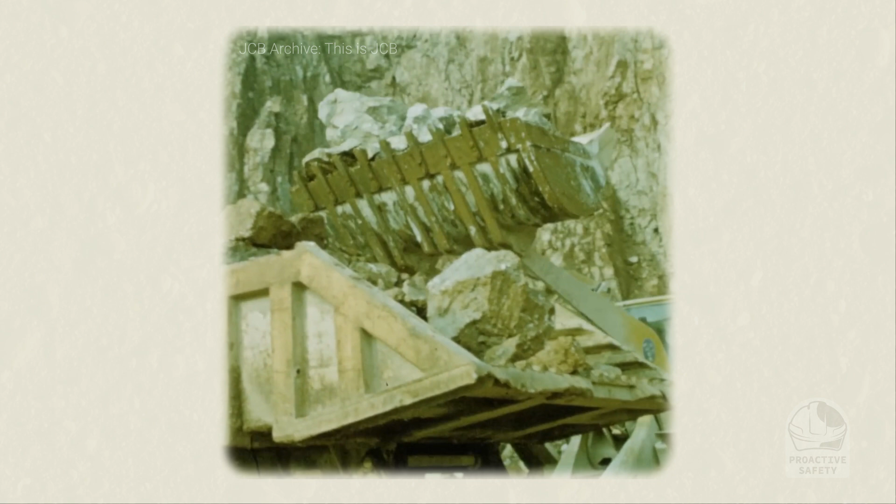Why train? It's necessary wherever you go. It is also a means by which operating costs, accidents, and injuries are reduced. It can save lives. Whether this is your first year on the job or you've been working for 20 plus years, there is always something you can learn.

As you progress through this course, you may be tempted to skip or ignore certain sections. Please note that by doing so, you may not only prevent the course from earning the appropriate score required, but it also may prevent you from learning or remembering important safety principles. Do not skip questions. Take the time to answer them carefully. They will prepare you for the final exam.

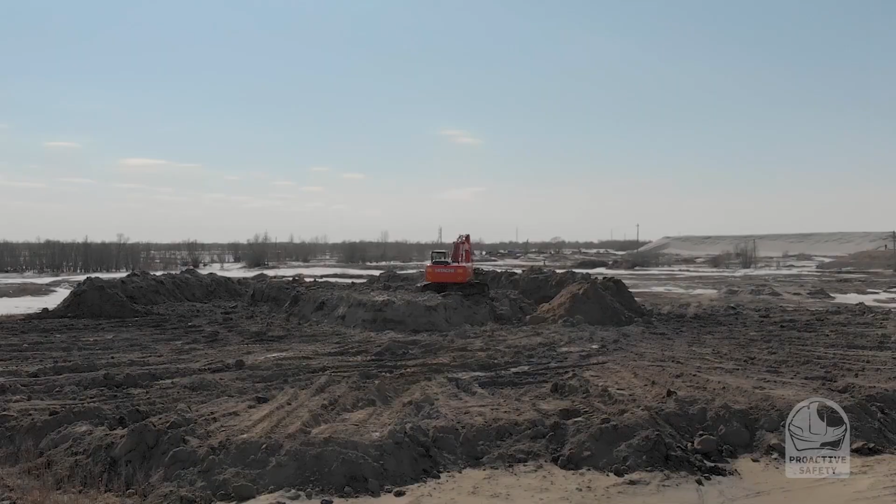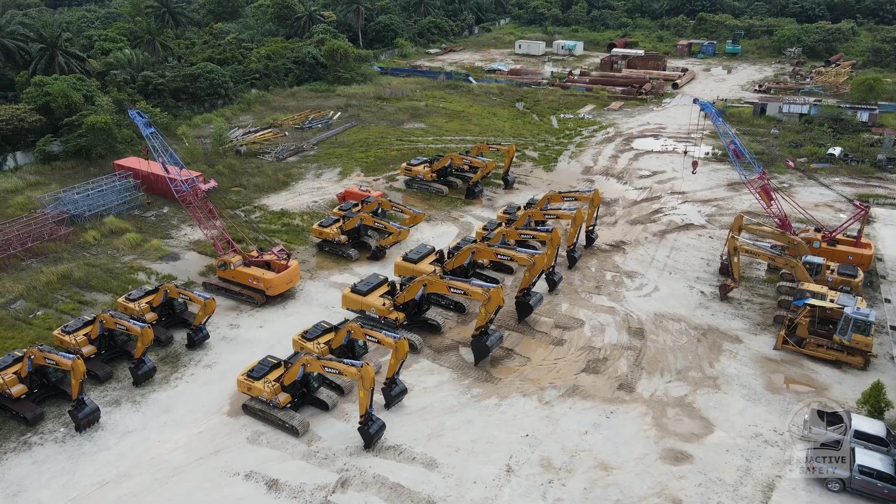Responsibility. The material presented in this course is for educational and training purposes only. All parties involved in the development, distribution, and maintenance of this course will be held harmless from any incident resulting from misuse of the content beyond the standard and purpose set forth herein. Before you begin, you should understand that it is your responsibility to comply with the laws and regulations presented in the following courses and its corresponding material.

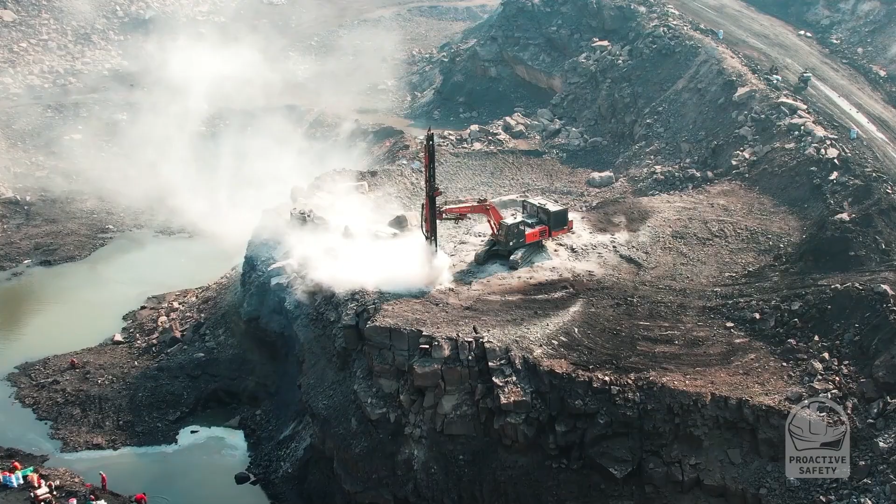It will be the responsibility of each operator to read, understand, and comply with the requirements of the operator's manual for their specific equipment. Likewise, it is your responsibility to strictly follow any additional guidelines specific to your own workplace. Good luck and stay safe.

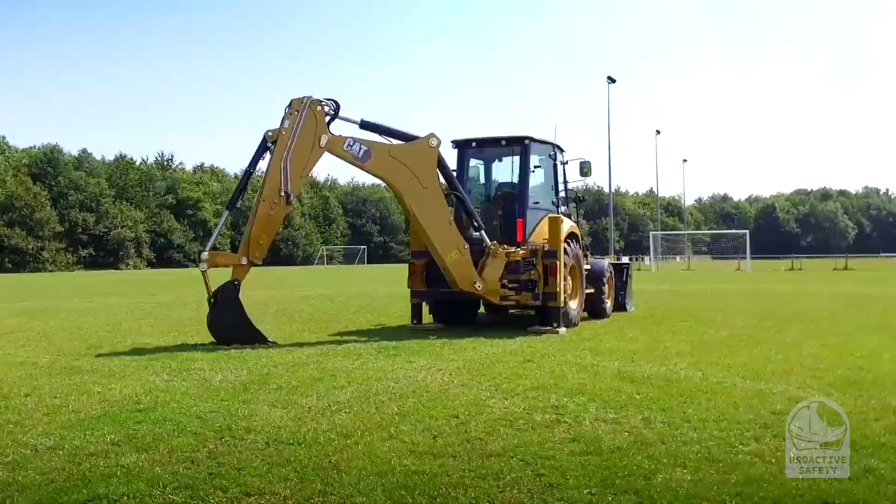Backhoes are versatile machines found on virtually every construction site. They are used for a variety of tasks such as digging trenches, demolition, and removing or transporting construction materials. There are a variety of tools that can be attached to backhoes, allowing them to perform a greater variety of tasks. However, while backhoes are extremely useful machines, they are also very dangerous.

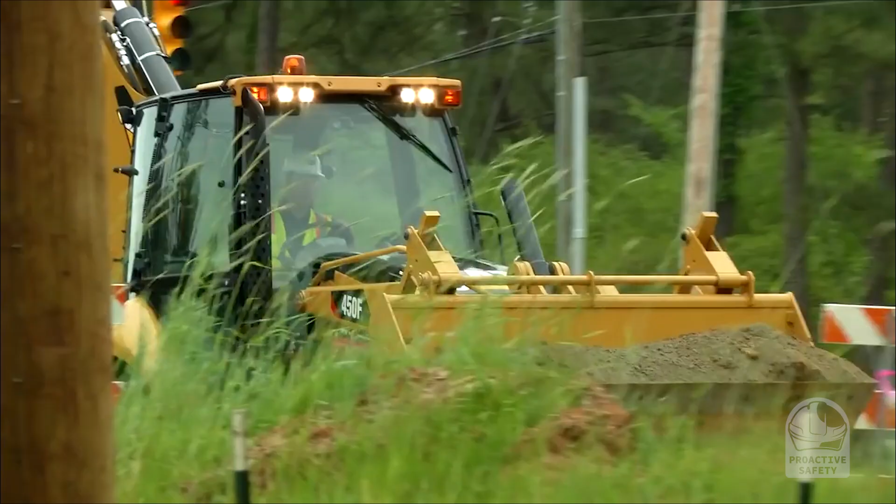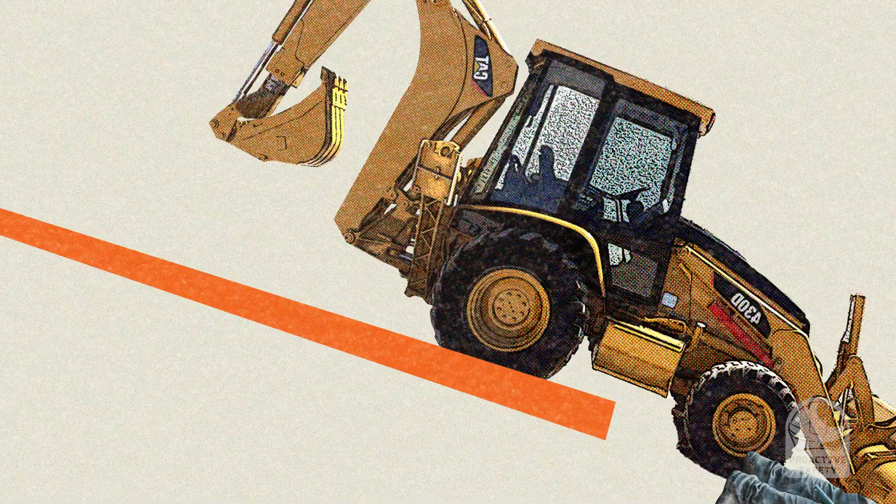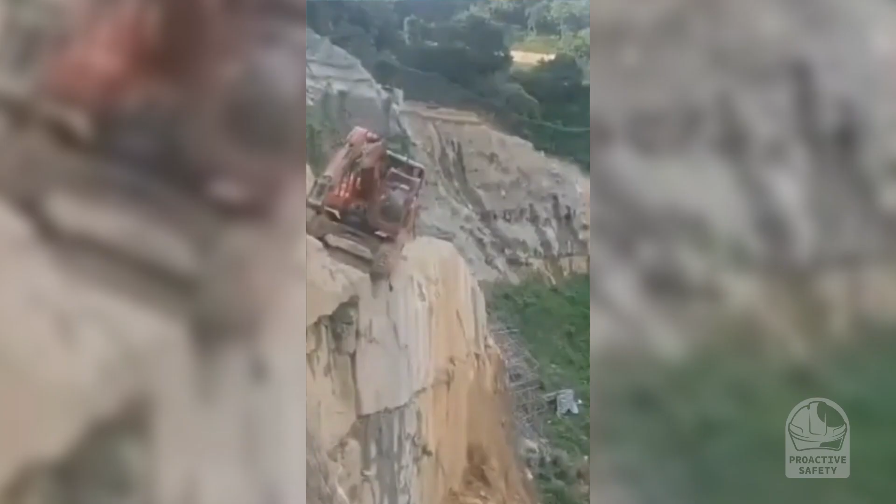However, as Chad drove away, the parking brake failed and the backhoe began to roll down the hill towards him. He tried to jump to safety, but the machine caught his legs and ran them over. Unfortunately, this is not an isolated incident. Similar incidents occur every year. In fact, research shows that around 800 workers die each year in accidents involving heavy machinery. However, with proper safety training, these types of incidents can be prevented.

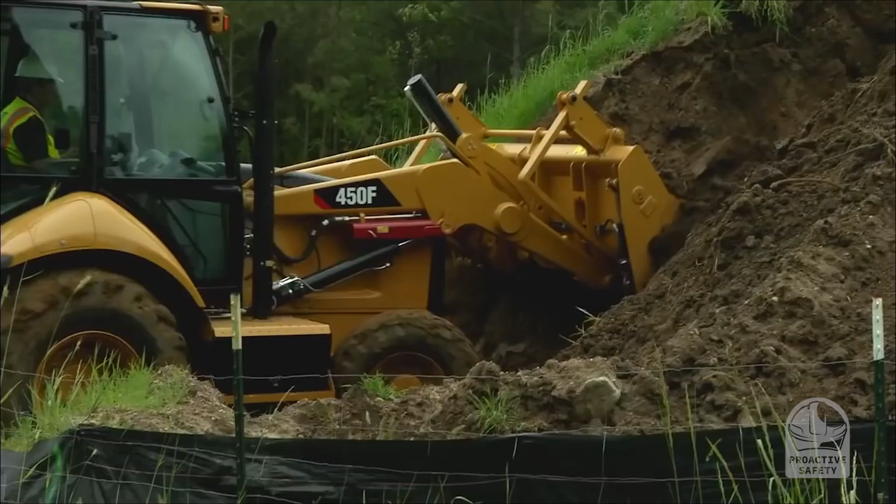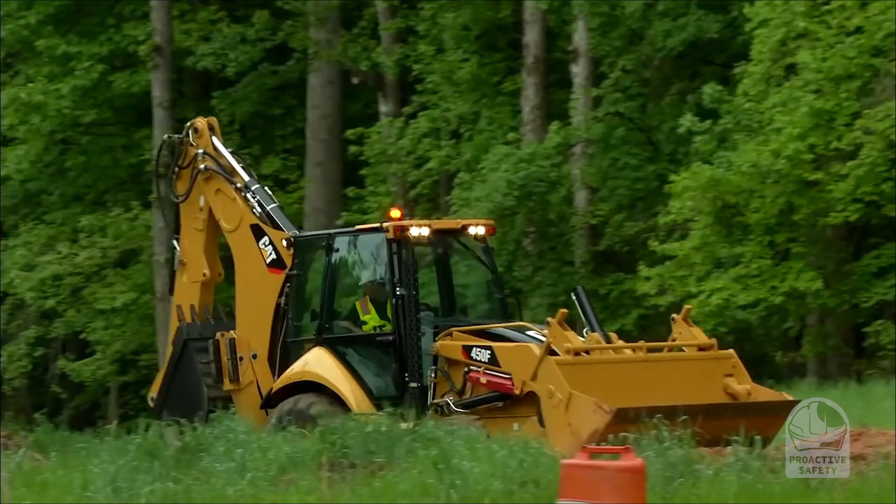In this training, we will go over the different functions and components of backhoes to help you perform your pre-shift inspections properly. We'll start with the components of inspections on the outside of the backhoe and then look at the parts and controls to inspect the inside. We will also review the concept of machine stability and focus on terms such as the center of gravity and the stability triangle. In that section, we will also discuss specific safety principles for maintaining stability, such as using outriggers or operating your backhoe on a slope.

Below, we'll go over what you can do to optimize the safety at work. This will include concepts such as maintaining your physical and mental health, as well as wearing appropriate PPE. Next, we'll cover the safety principles to follow when operating your backhoe. This includes how to set up your machine correctly. In the last section, we'll go over workplace planning, common workplace hazards, and best practices for avoiding or minimizing them.

Throughout this training, we will analyze profiles of real and investigated incidents or accidents. In some cases, 2 or 3 similar accidents have been combined in order to illustrate key safety principles. They will show how quickly things can go wrong when safety procedures are ignored, resulting in injuries or deaths.

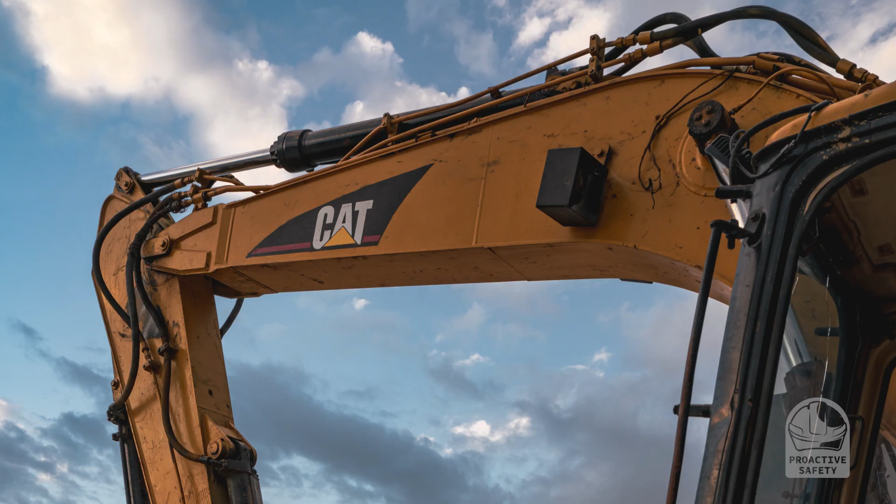Why train? No matter the situation, it's important to comply with federal and state regulations. Where does it say we need to train? Can't a worker be considered qualified based on experience? The answer is no. Experience helps, yes, but the regulations are very clear that employees must receive training no matter how long they have been on the job.

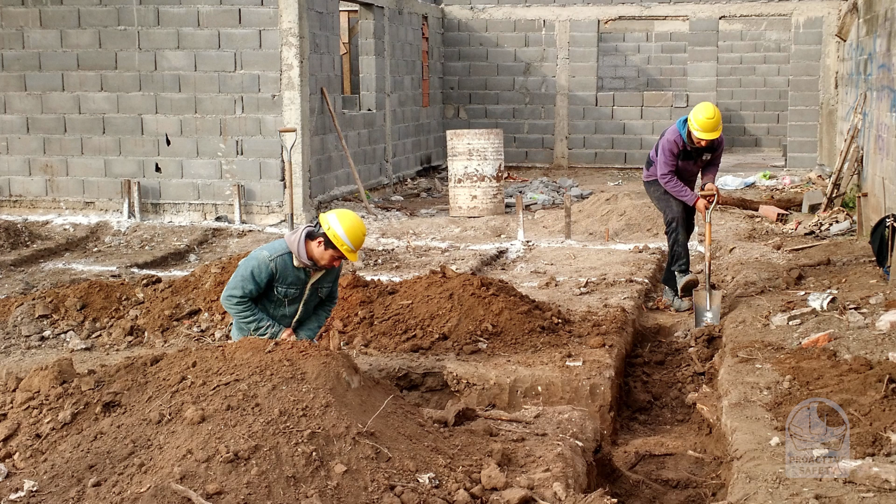And it is an employer's responsibility to oversee that safety training is being done and ensure that employees have the understanding, knowledge, and skills necessary to operate safely. Initial training and refresher training, as well as any written and practical evaluations, must be documented and archived.

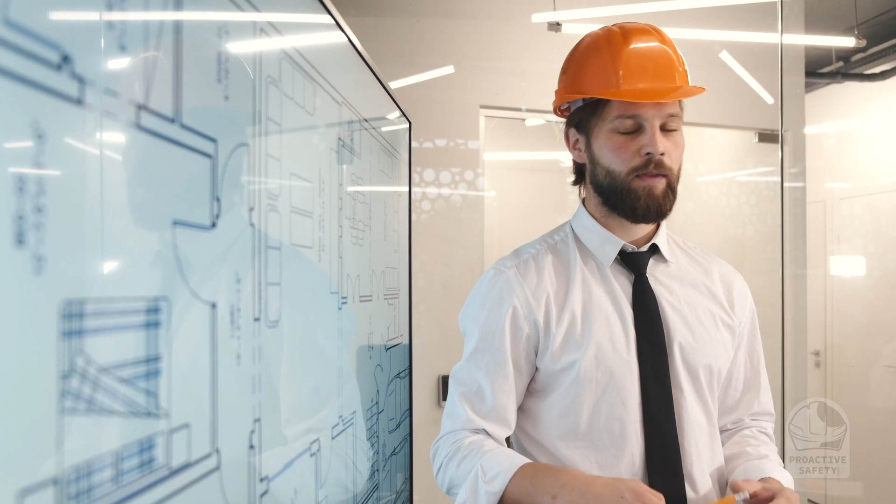As a minimum, employers must show proof of adequate and consistent training in the forms of training schemes, class lists, training goals, tests, certificates, etc. These documents must include the name of the person who taught the class or conducted the evaluation. However, training is not a one-time event. It is continual. In fact, training should be provided whenever it is demonstrated to be necessary.

Employees must receive training in the following instances. Number 1, there are changes in your assigned functions. 2, there are changes regarding possible risk of exposure for which the employee has not received any training. 3, any deficiencies have been observed in the work performance of an employee that is related to the safety and health of themselves or other workers. 4, an accident has occurred or an employee has been injured or there was a near miss during the operation.

The scope of training will be determined by the employer, but at a minimum must include proof of continuing competency. A presentation followed by a written exam and practical exam that proves continued competence.

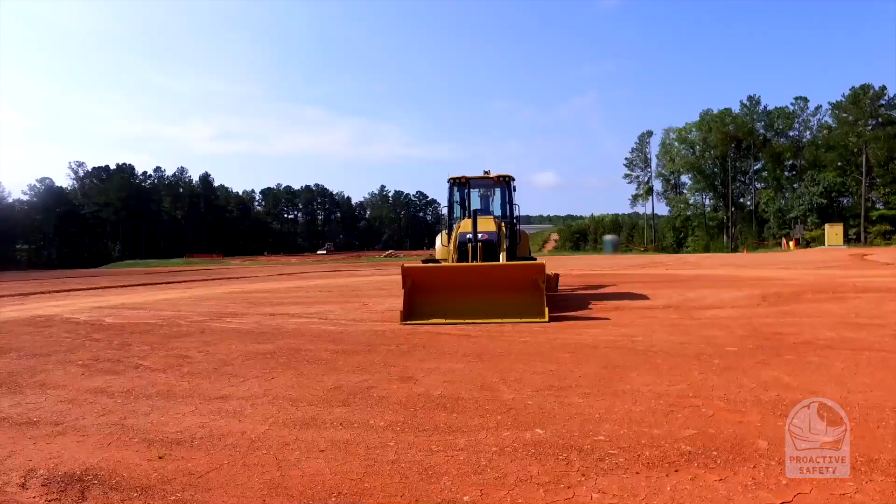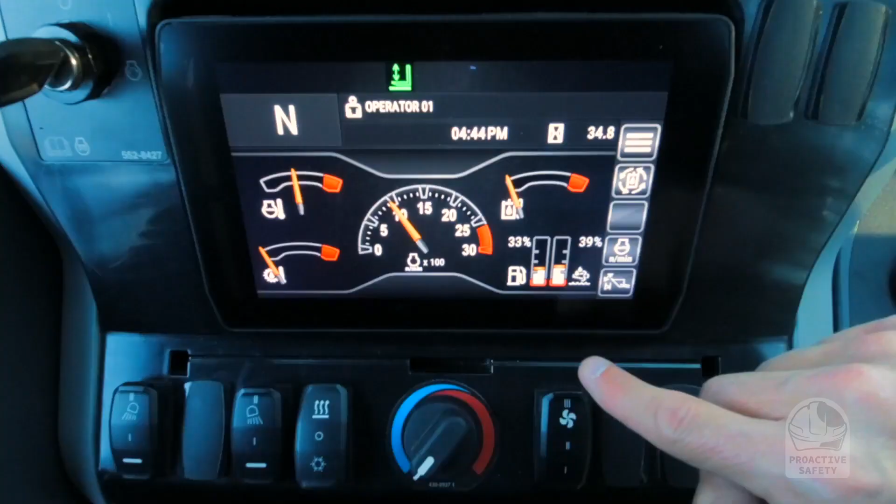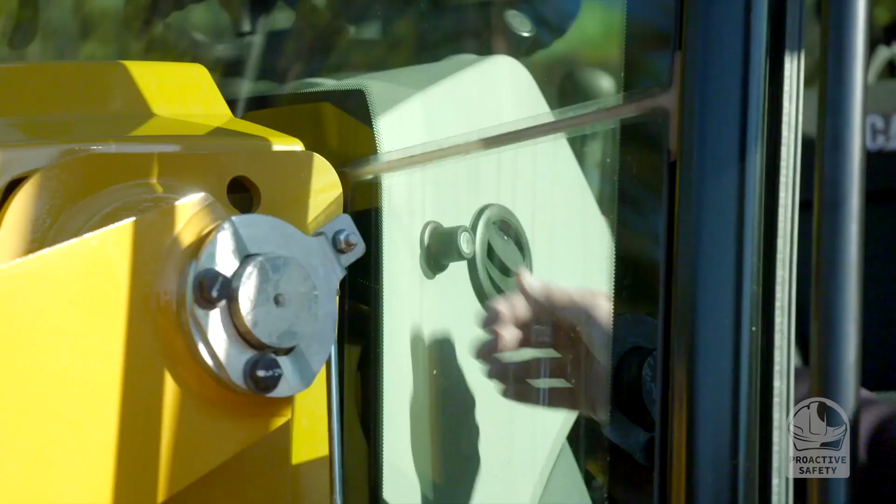Anatomy and inspection. In this section, we will look at the basic anatomy and concepts of the backhoe and describe each of them briefly. We'll also go over things to look for when performing a pre-shift inspection. The operator's manual should have a more detailed list. Pre-shift inspections are generally divided into 2 groups: inspections when machinery is on and inspections with the machinery off. However, we will address both checks at the same time. We review the exterior and interior inspections.

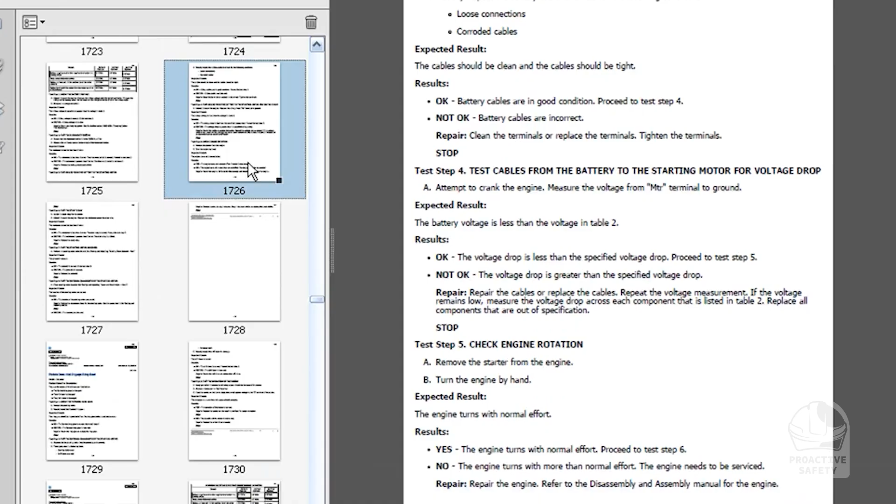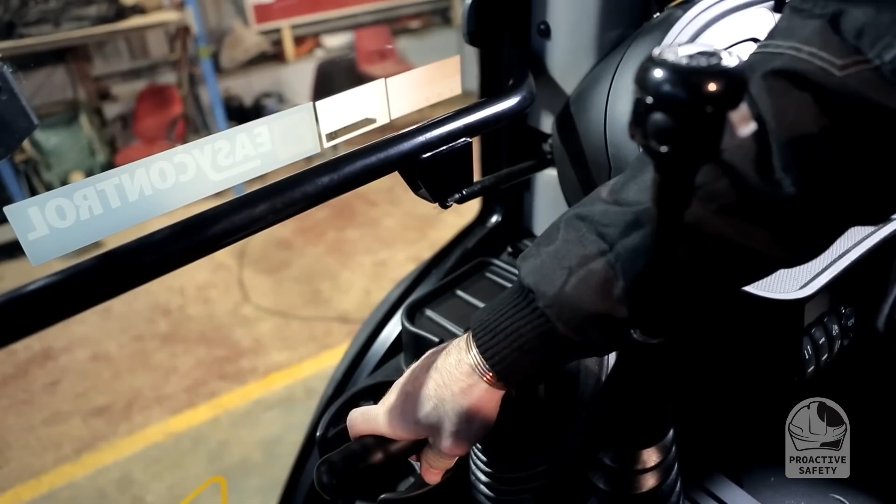Operator's manual. Keep in mind that getting familiar with the backhoe starts with the operator's manual. The operator's manual must be on the machinery at all times. Everyone who operates a backhoe should be familiar with it, especially the safe operation part. If your manual is illegible or missing completely, request a replacement immediately. While performing a pre-shift inspection, use a checklist specific to your backhoe as a guide. Your operator's manual will contain such a list, or your employer can provide you with one. Please follow the checklist.

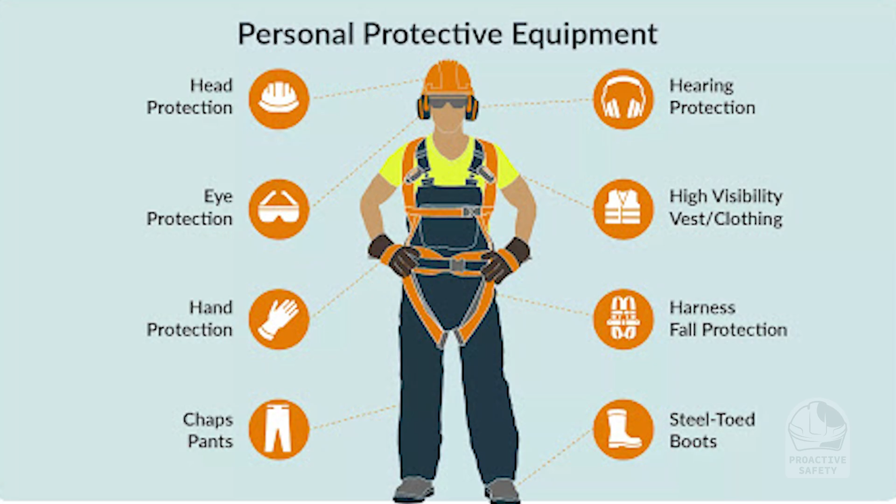PPE, personal protective equipment. Before performing any inspection, put on appropriate personal protective equipment. You may need coveralls, gloves, steel-toe boots, and eye protection. Employers should inspect the workplace and select appropriate PPE for their employees. Ask your employer what PPE is required for pre-shift inspections.

Maintenance mats. In addition to appropriate PPE, take extra precautions to avoid an accident or injury during maintenance work. Consider using maintenance mats to prevent slipping. Also, avoid working alone. Best practices say you should have a second person with you for maintenance jobs that require an engine to be running. Definition: maintenance mats are mats that help create an even surface or traction while working on your heavy equipment.

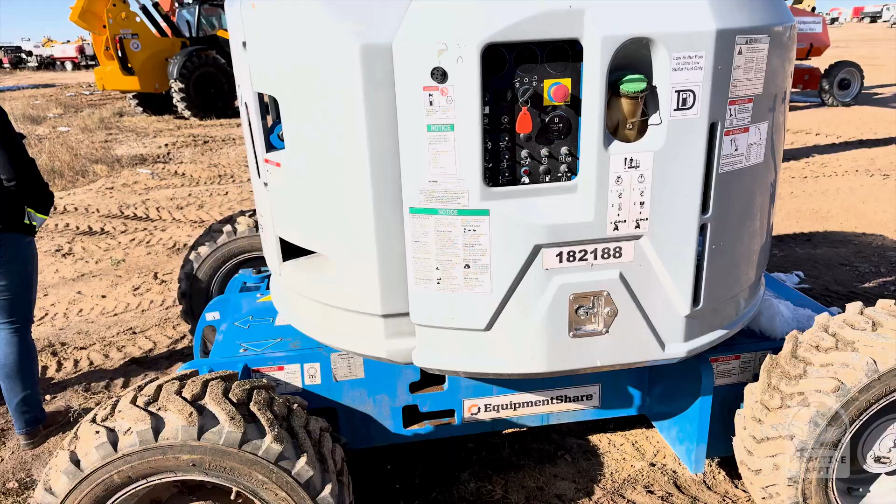Exterior labels. The exterior of your machine must have safety decals and label warnings of potential operating hazards. See the operator's manual for a list of required labels and their locations. Replace immediately if missing or if it's unable to be read.

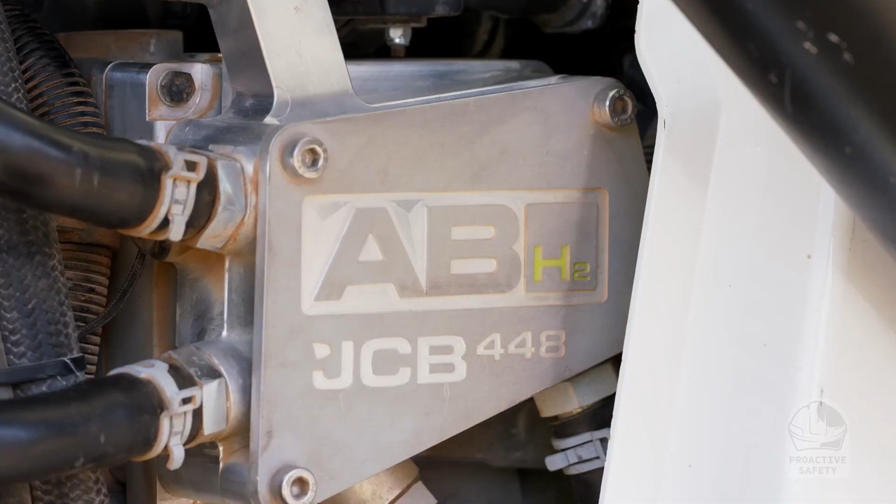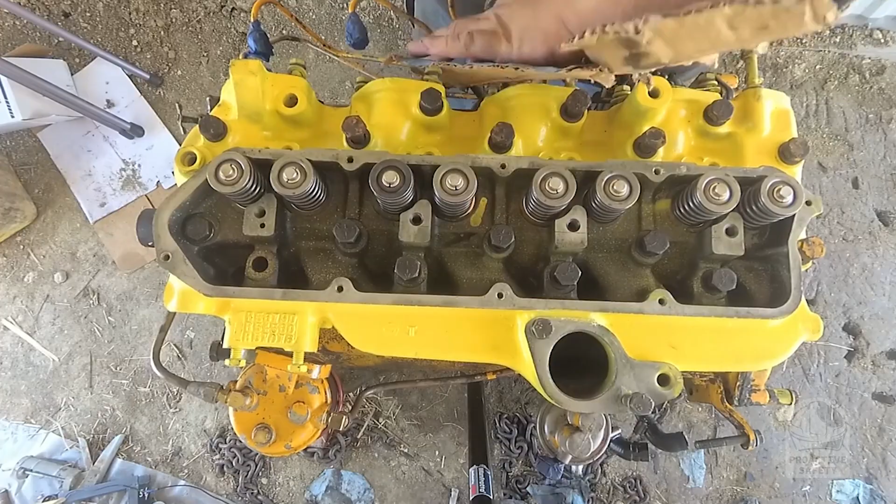Motor. The engine is the heart of the backhoe, and just like your body, if you take care of it, it will live longer. For this reason, strictly follow the maintenance schedule dictated by the manufacturer in the operator's manual. Perform additional inspections and send your backhoe for maintenance as necessary. Never wait until the next scheduled inspection to investigate or fix a problem that needs immediate attention.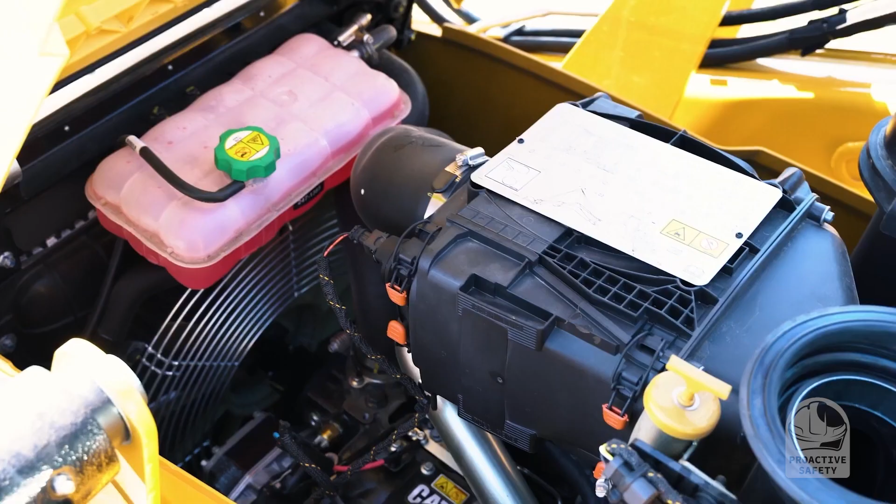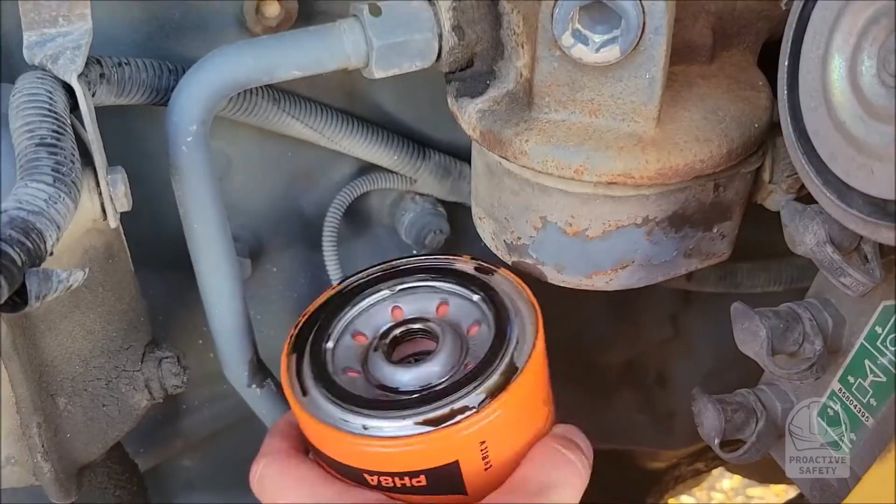Oil and other fluids. Check your fluids every day. This includes hydraulic and transmission fluids, as well as engine oil. While there will likely be an oil gauge inside the cabin, you will also want to check the condition of the oil. It should be relatively clear and not excessively dirty. Replace it as often as suggested in the maintenance manual or sooner if necessary.

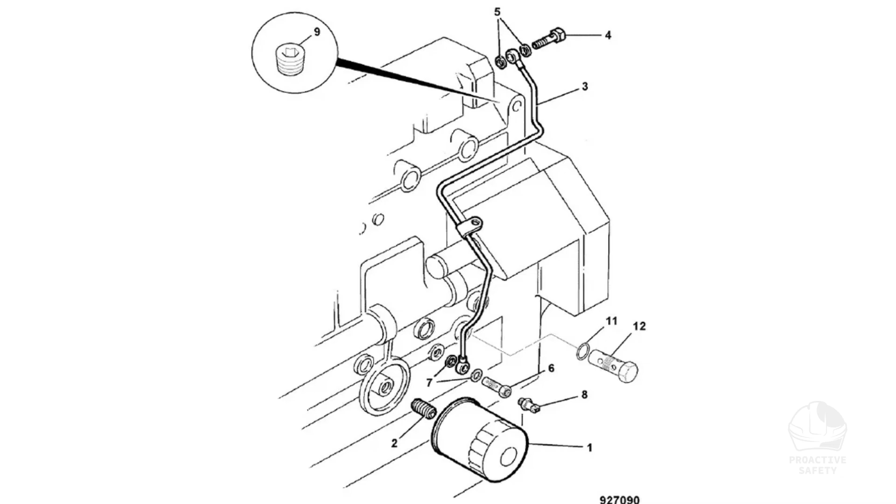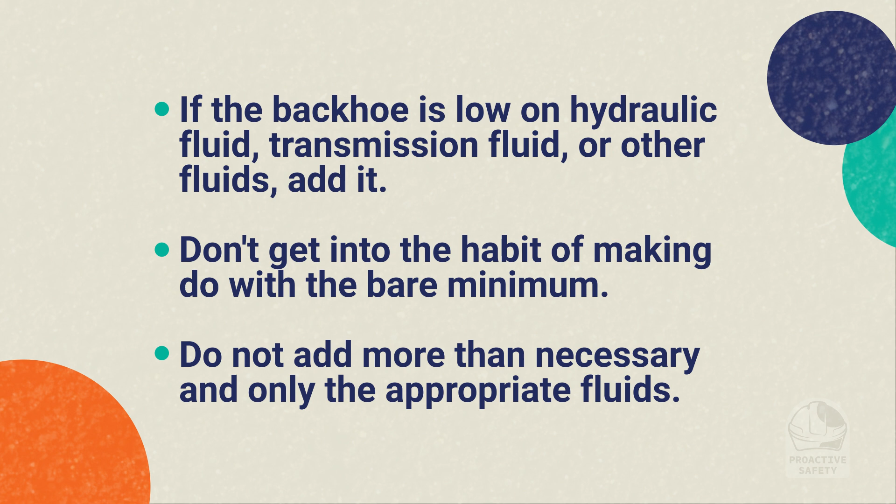Take notes. Best practices say to first check the oil, antifreeze, and other fluids while the engine is off. Checking them with a hot engine can be extremely dangerous. If the backhoe is low on hydraulic fluid, transmission fluid, or any other type of fluid, add to it. Don't get into the habit of making do with the bare minimum. Do not add more than necessary and only the appropriate fluids.

An easy way to determine if your backhoe is leaking fluids is to look for stains on the ground beneath the machinery. If you detect signs of an oil or hydraulic fluid leak, be sure to have it checked first by a licensed and trained mechanic before operating.

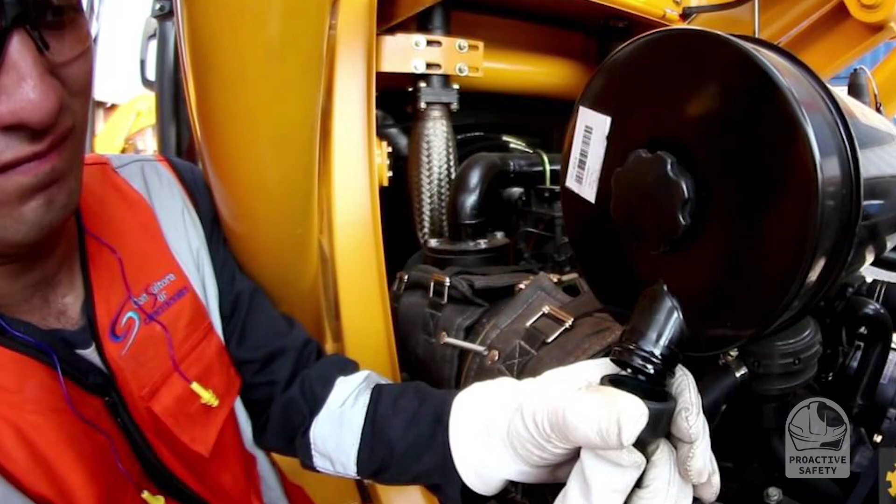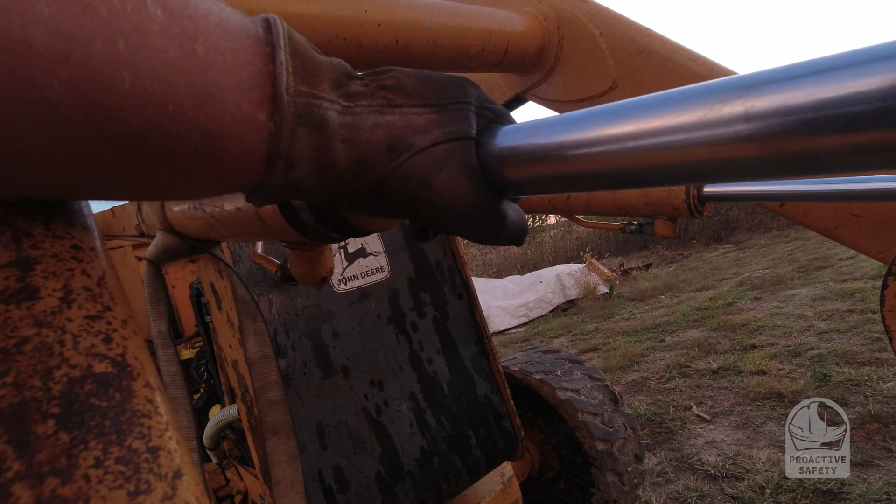Hydraulic elements. You should also examine the hydraulic systems and hoses. When doing so, wear gloves and eye protection. Even a pin-sized leak can inject high-pressure fluids through the skin and into the bloodstream. This can lead to possible infections or even death. Remember to always protect your hands.

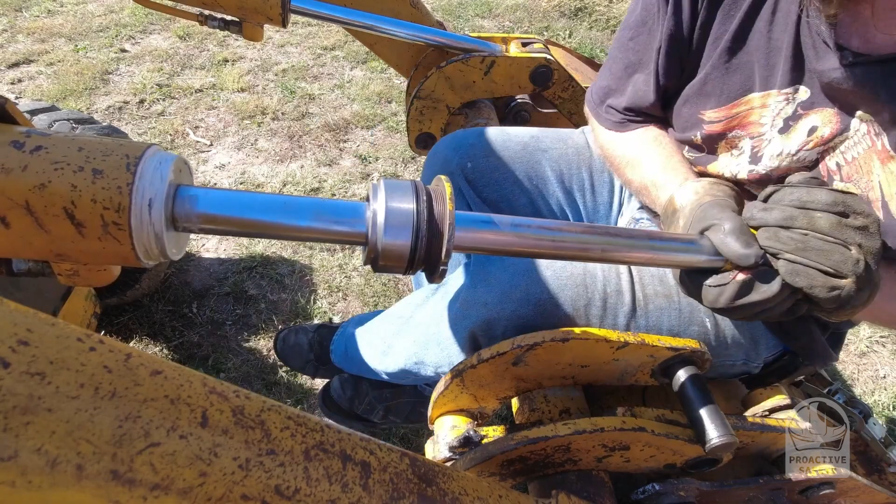If you suspect a leak, avoid using your hands to check it. Instead, run a piece of cardboard along the hose. This is known as the cardboard test. If a leak is found, remove the machine from service until it is repaired.

Chassis and bodywork. The chassis and frame support the body of the backhoe as a whole. If not properly maintained, the entire vehicle can fail.

Perform inspections and maintenance as described in the manufacturer's manual. While you may or may not be a mechanic, anyone can inspect the chassis and frame for obvious signs of

failure. Swing unit. While inspecting the chassis and the frame of your backhoe, be sure to inspect the swing unit as well. This is the series of hoses, pins, and cylinders that allow the boom to swing from side to side. Check the swing unit is adequately lubricated and that its components are not damaged or leaking, especially the bushing and hinge pin.

ROPS and FOPS. Carefully inspect the rollover protective structure, ROPS, and falling object protective structure, FOPS. Look for dents, bends, cracks, and other damage. If you find damage of these structures, replace the ROPS or the FOPS immediately.

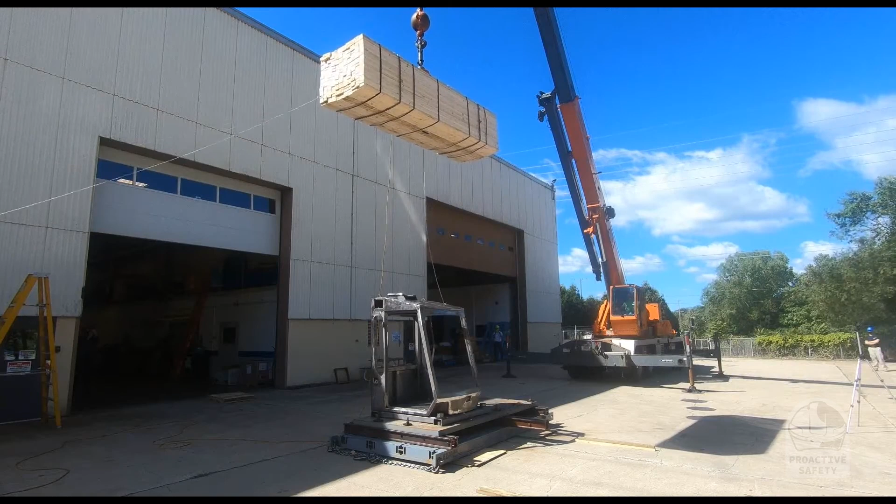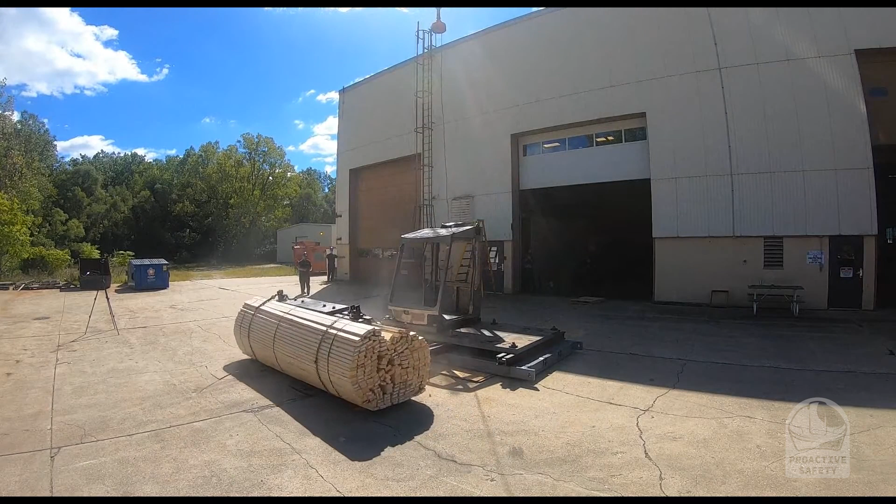Do not, under any circumstance, modify the ROPS or FOPS by welding additional parts, drilling holes, cutting, grinding, or any other types of modification. This will negatively affect the integrity of the ROPS and FOPS and will require replacement.

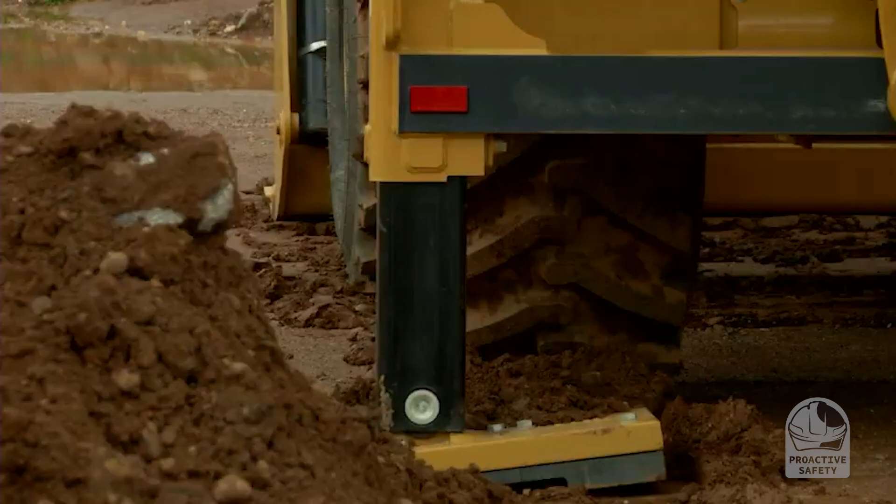Stabilizers. Inspect the stabilizers on your backhoe to ensure that the swing unit is in good condition and not damaged. This includes the stabilizer pads. Check that these pads are flat and undamaged to help with stability when using your stabilizers. Remember to check the hinge pins, bushings, hoses, cylinders for wear, leaks, or other damages.

Backhoe accessories. Test your backhoe arms, buckets, dipper arm, and any other attachment to make sure that they work properly and respond quickly. Remember to inspect and test your hydraulic components as well. In each case, they should move up, down, left, and to the right, as well as tilt and twist effortlessly without snagging.

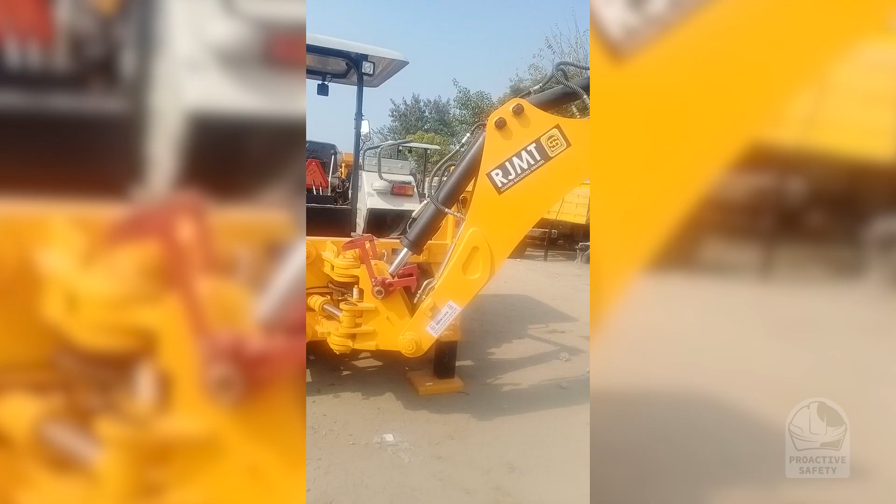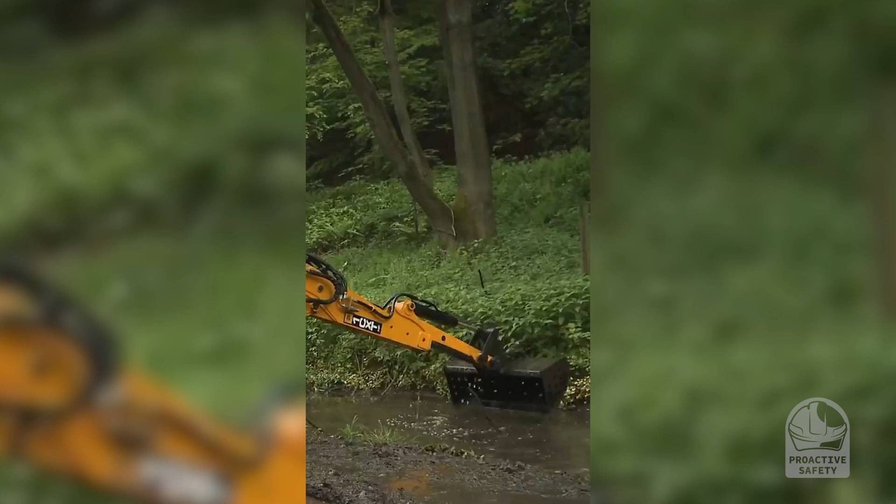Loader assembly. The loader assembly is a complex system of arms, hinges, pins, cylinders, hydraulic system, and bucket. Like everything else, it is necessary to visually inspect all these components for damage and test them to make sure they work properly.

Loader bucket. When inspecting the loader assembly, pay special attention to the loader bucket. It may seem indestructible, but it is still capable of causing damage that can put you or your coworkers at risk. Check the bucket for wear, loose parts, or any sign of deformation that can hinder proper operation.

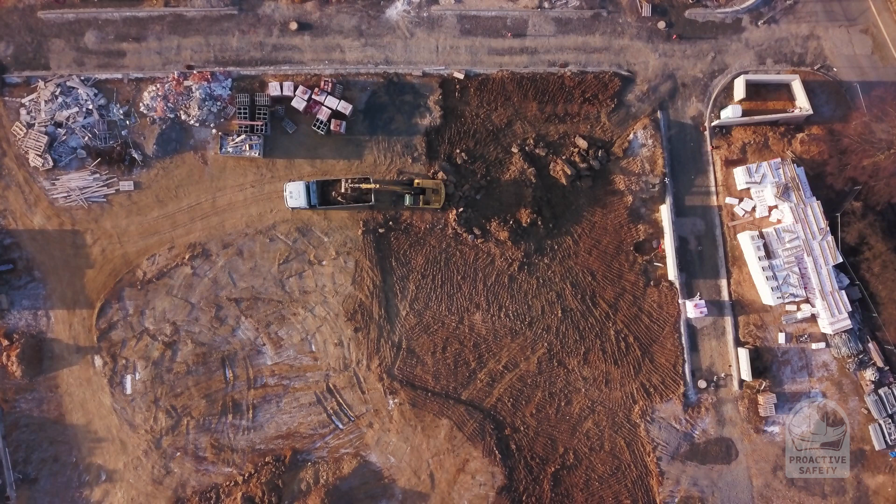Backhoes use hydraulic cylinders and hinges to extend the arm and tilt the bucket. Inspect these components to ensure they are properly lubricated and not damaged. Use the cardboard test to check for hydraulic fluid leaks from cylinders and hoses.

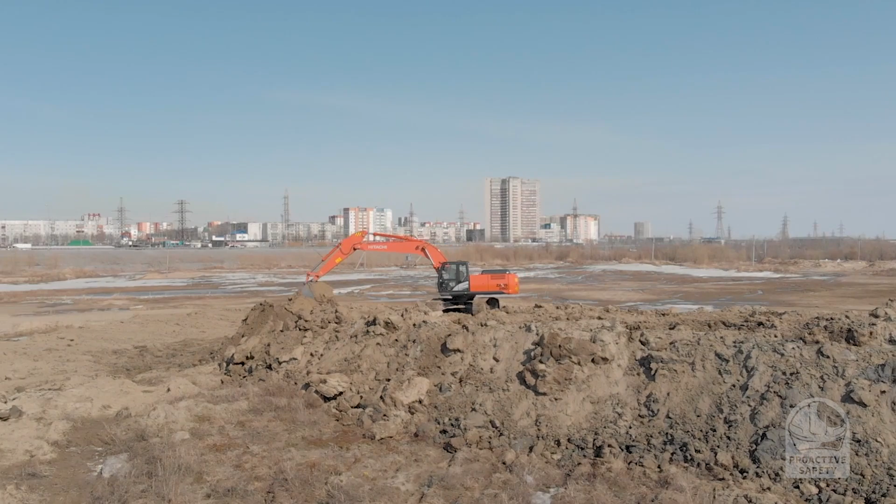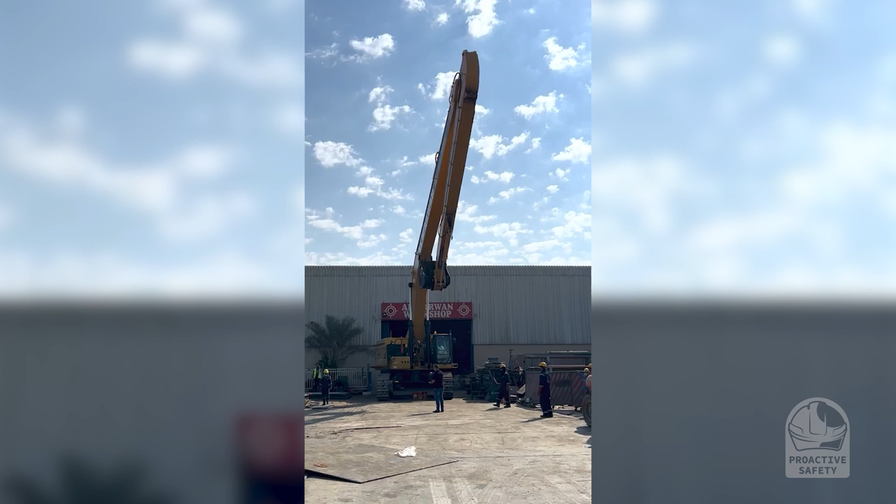Boom and stick arm. Both the boom and the arm use hinge pins to connect each other and then to the swing unit. These components also use a hydraulic cylinder to raise and lower them. Did you know many backhoes have an additional section in the arm that extends beyond its initial reach? This section is called the hoe extension. It also uses a hydraulic cylinder to extend and retract.

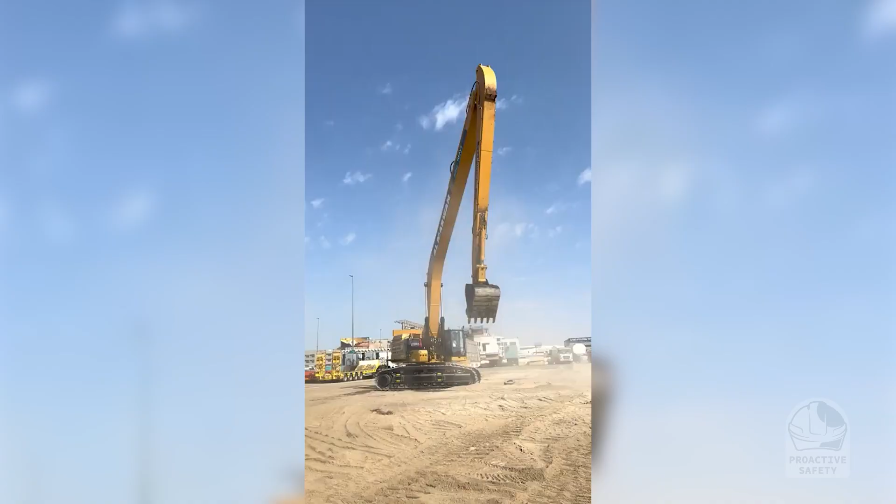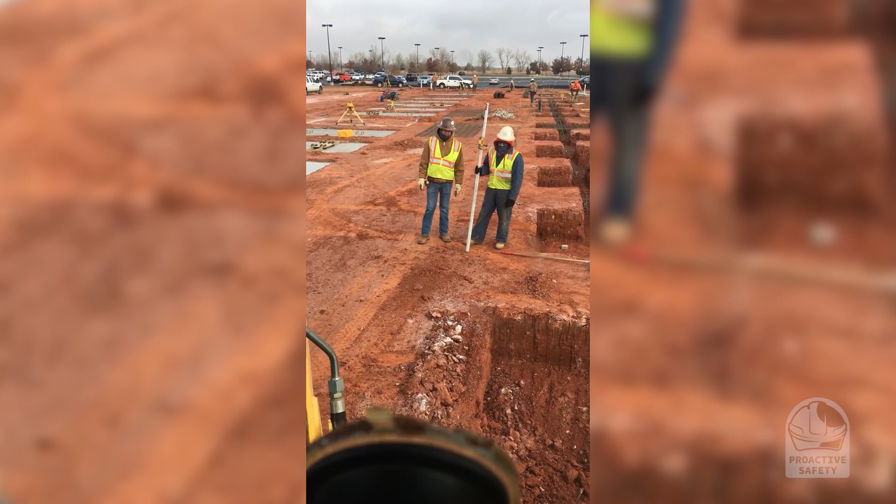Tires and wheels. When inspecting tires, check for worn tread, improper inflation, leaks, cracks, excess mud, and lodged debris. Repair, inflate, or replace them as necessary. Be sure to remove debris as well.

Also examine the wheels. Look for missing or loose lug nuts, bent rims, excessive rust, or poor alignment. Repair or replace them as necessary. Always check both sides of the wheels and tires.

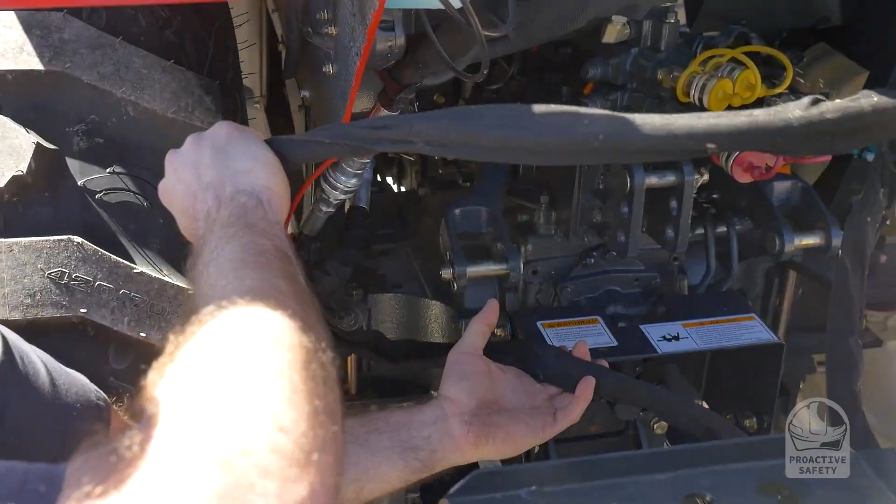Hoses and wiring. Inspect all hoses and wiring on your backhoe before using the machine. Check to see if there's anything that looks suspicious or obviously needs repair.

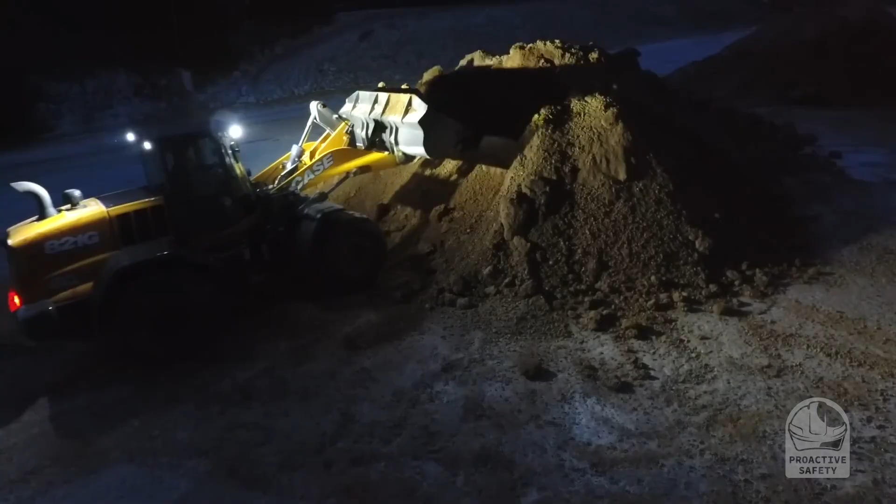Lights. Check all lights on the machine, including brake lights, headlights, and reverse lights. Replace or repair lights that are damaged or not working properly. This is especially important if you work at night or in a dark warehouse. And of course, never disable a backup alarm or warning light.

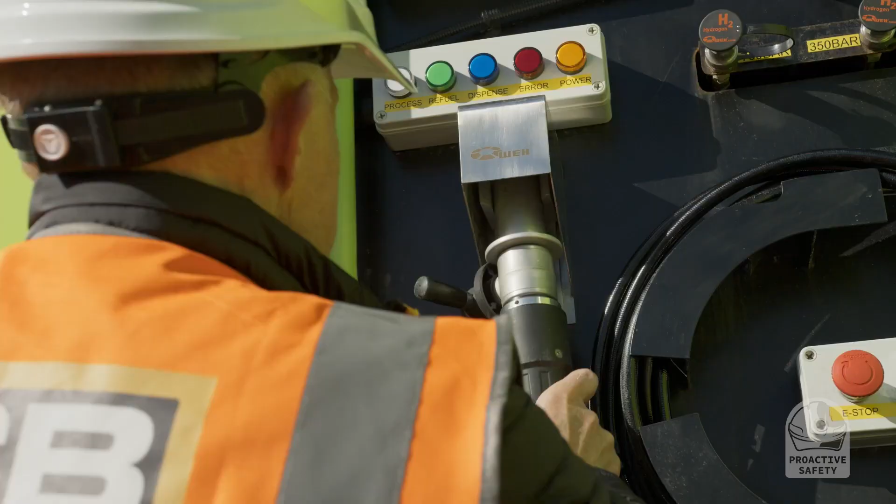Fuel levels. Check fuel levels and fuel filters, especially if the machine has been idle for an extended period. You should be familiar with the type of gas your machine requires and how to refuel it safely. Never smoke or use flames when checking the fuel levels or refueling.

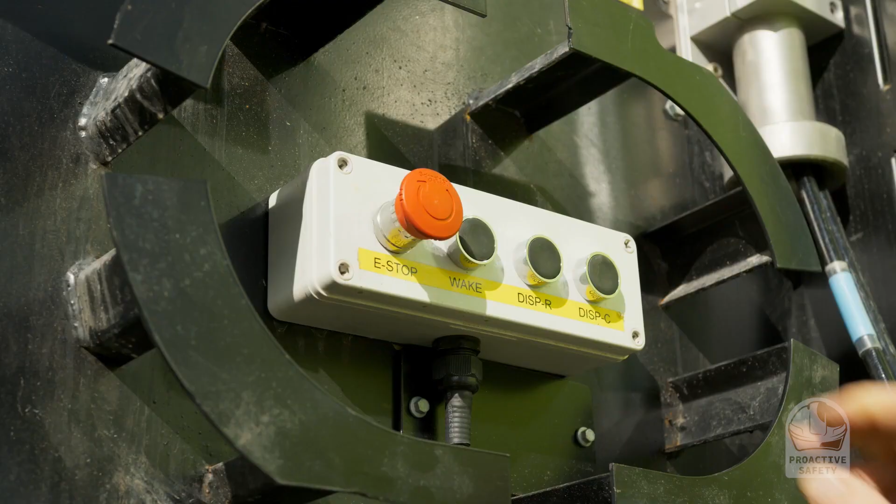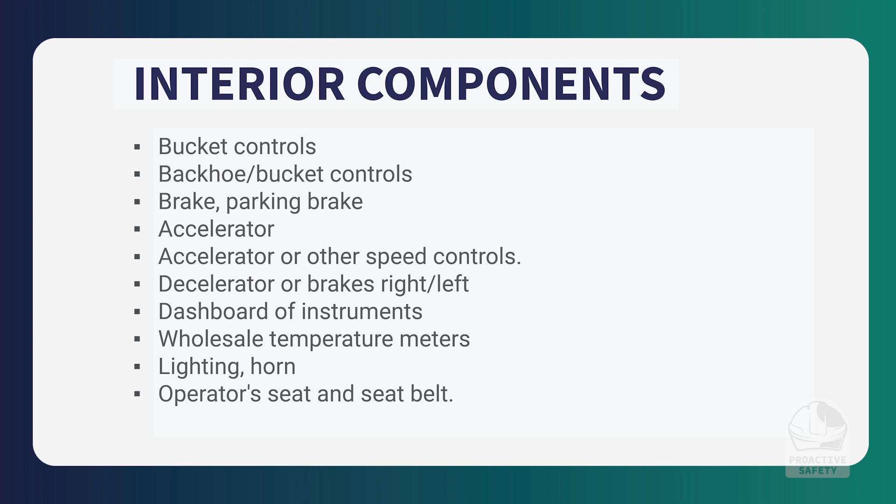Interior inspection. The graphic on the left lists some of the major interior components of a backhoe. The types, names, and locations of controls will vary by brand and type, but you should always use a checklist specifically for your machine to guide you through the pre-operation checks. This checklist is usually provided by the manufacturer or your employer. Again, you must strictly follow the maintenance schedule found on the machine itself.

Operator's manual. The operator's manual has guides for inspection and maintenance. It is usually located behind or near the seat and must be on the machine at all times. If you notice that the manual is illegible or missing, replace it immediately. Everyone who operates the machine must have access to the manual and be familiar with it.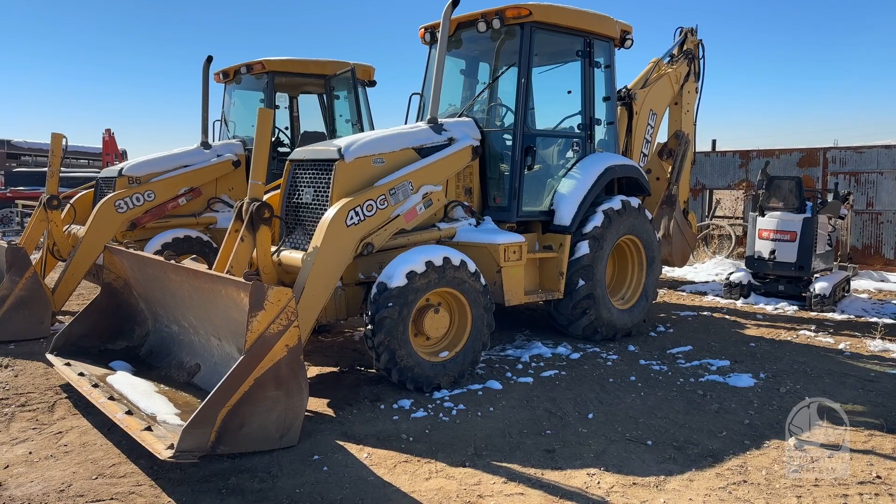Too often, operators operate machines without knowing where the manual is or having never read it. This is especially true for attachments, as they also come with their own manuals. Keep these manuals with the operator's console at all times so you can read and understand them. Cabin floor.

Inside the machine, the easiest place to start inspecting is the floor. It is common to see water bottles, chains, or other tools or trash cluttering this area. Keep clutter to a minimum so that it does not interfere with braking or acceleration of the backhoe.

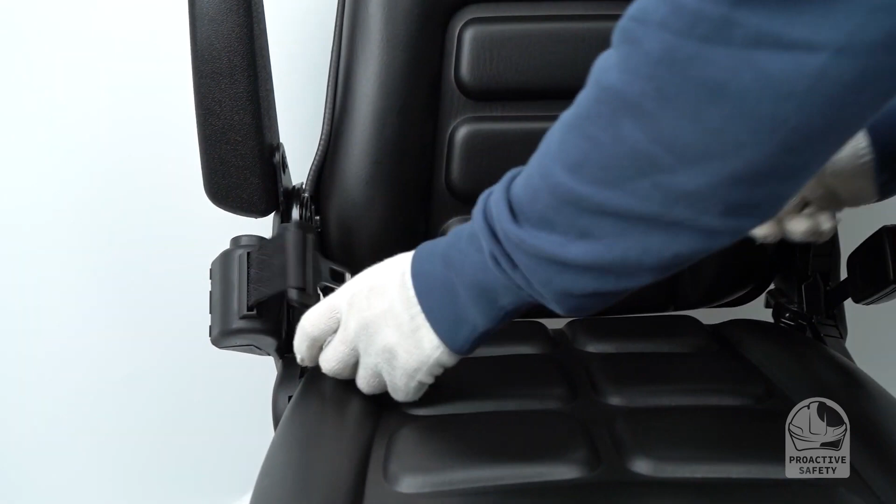Seat. Additionally, you should inspect your seat. It may seem unimportant, but it is a device designed to keep you safe. This is especially true when it comes to ergonomics and the health of your back and spinal muscles. As soon as you are seated, adjust your seat to suit you. If the seat is damaged in any way, take the time to fix it.

Swivel seat. A unique feature of a backhoe is the fact that the seat rotates 180 degrees, allowing you to easily switch between controls. You should test the swivel functionality to ensure the seat rotates smoothly and then locks into place.

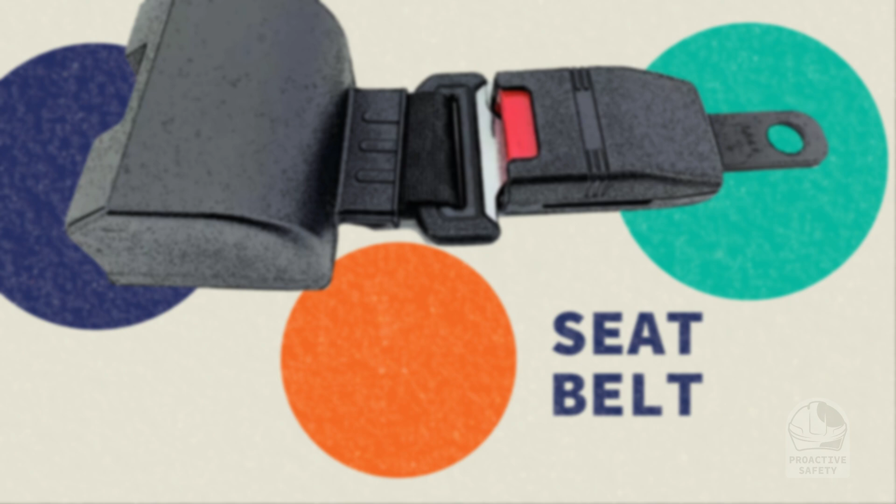Seatbelt. Also inspect the seatbelt and make sure it locks and unlocks properly. If there is excess rust that prevents the belt from locking and unlocking easily, or if there are any tears in the fabric, fix the problem immediately by sending the machine for repair. Some older machines may not have a seatbelt, in which case you should consult the manufacturer. Many companies have seatbelt kits that need to be installed on older machines.

Interior cabin decals. Manufacturers require certain warning labels and information decals to be placed inside the cab. These are not just for show or sole reference, but have everything to do with safe operation. Keep them clean and replace them if they are missing, illegible, or even damaged.

Controls. Once you have inspected the cabin and determined that it is in good condition, it is time to test the controls. With the emergency brake set and the transmission in neutral, start the engine. Next, review each function of the backhoe to make sure the controls do what they're supposed to do. Check each lever, button, toggle switch, or pedal to ensure that they work smoothly in all functions. They should work as intended without crashes or delayed reactions.

Pay attention to the gauges and markings, especially the fuel level, oil pressure, and voltage and pressure gauges. They should function correctly, and the readings should be within normal operating ranges. If they are broken or not working properly, turn off the backhoe and report the problem immediately.

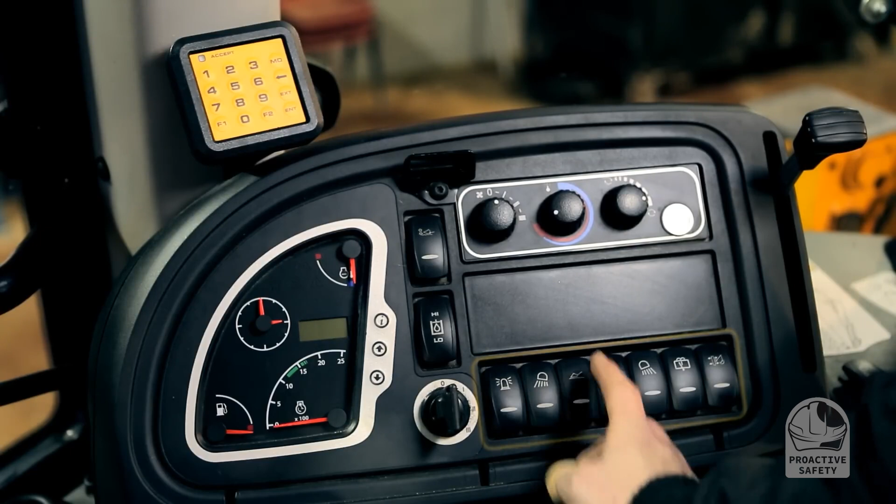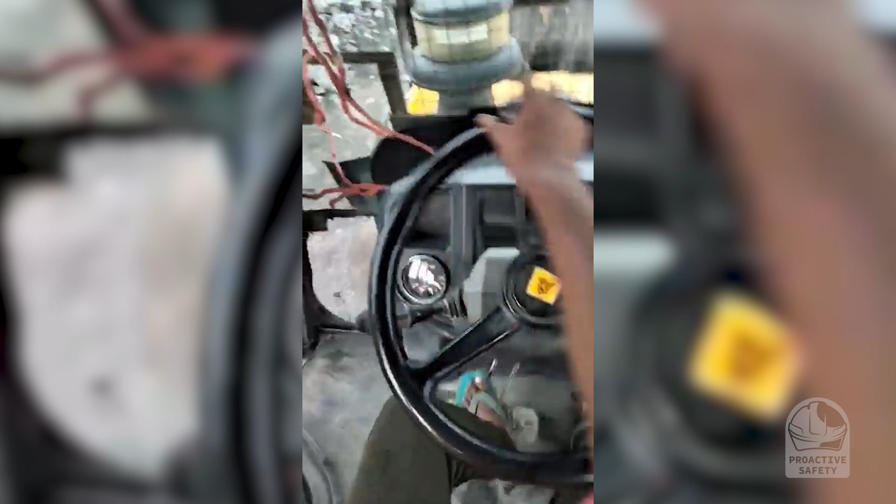Steering and the steering wheel. Turn the steering wheel in both directions. It should move easily and smoothly. If you have difficulty turning the wheel, or if you hear unusual noises during this process, do not use the machine. Fix any malfunction immediately.

Drivability. On a flat and safe area, test the machine's forward and reverse motion, as well as its turning and stopping capabilities. You must be able to control both the direction of travel and the speed at which you travel. With the transmission in neutral and the brakes applied, accelerate and decelerate the engine. The accelerator should run smoothly and return to idle quickly.

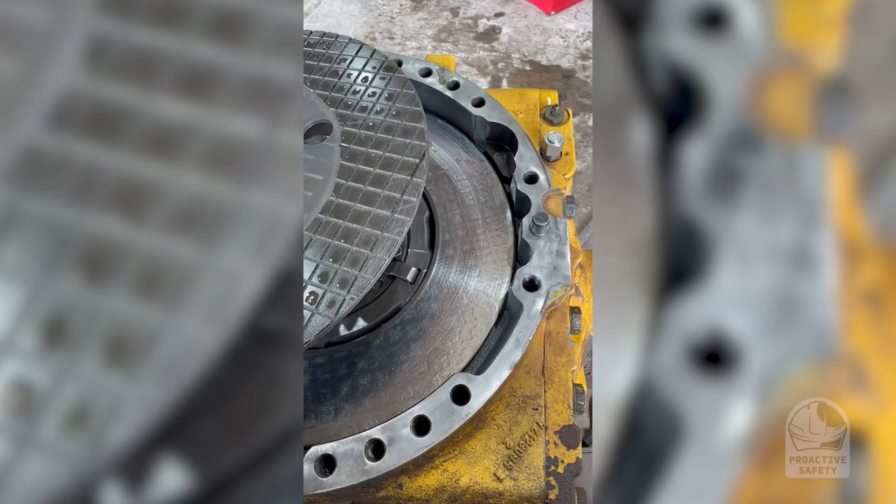Brakes. Operating a machine whose brake system has not been periodically inspected could result in serious injury or death. Always check the brake controls during the pre-shift inspection to see that they are working properly. The pedals in the cabin should operate smoothly and should not be damaged.

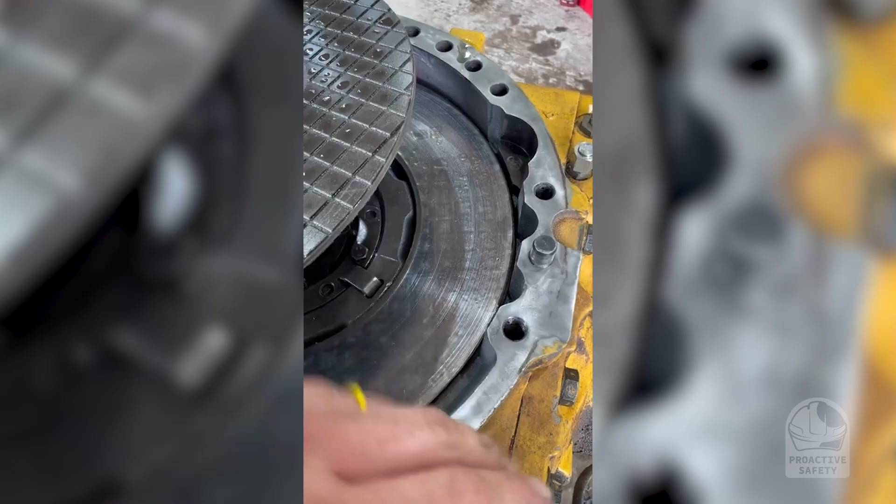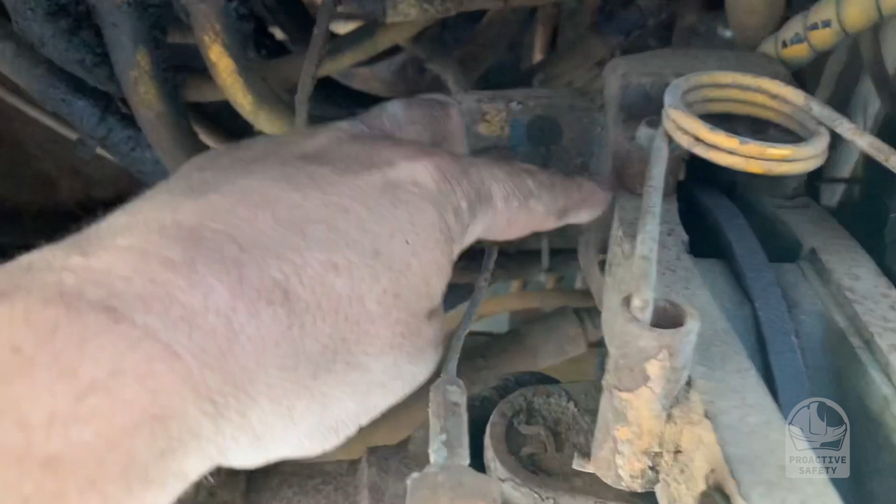Handbrake. The handbrake is essential to avoid involuntary movements. It is usually a yellow button located on the dashboard, but you should know where it is and how it works for your particular machine before beginning operations. Test the parking brake by setting it and then trying to move the machine forward and backward. The brake must hold. If not, have it checked by a qualified mechanic immediately.

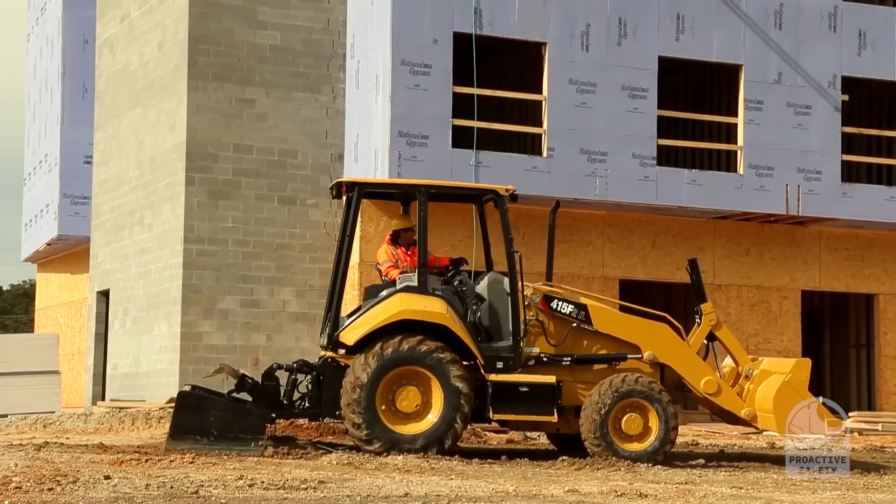The horn. The horn is one of the most important safety devices. You have to alert people passing by of your presence. The horn is likely located in the steering wheel. In some cases, it may be located on the gear lever. Try it every day and use it during your shift.

Mirrors and glass. You should always keep windows and mirrors clean and undamaged to maintain maximum visibility during operation. If there are cracks, dents, or damage, have it repaired immediately.

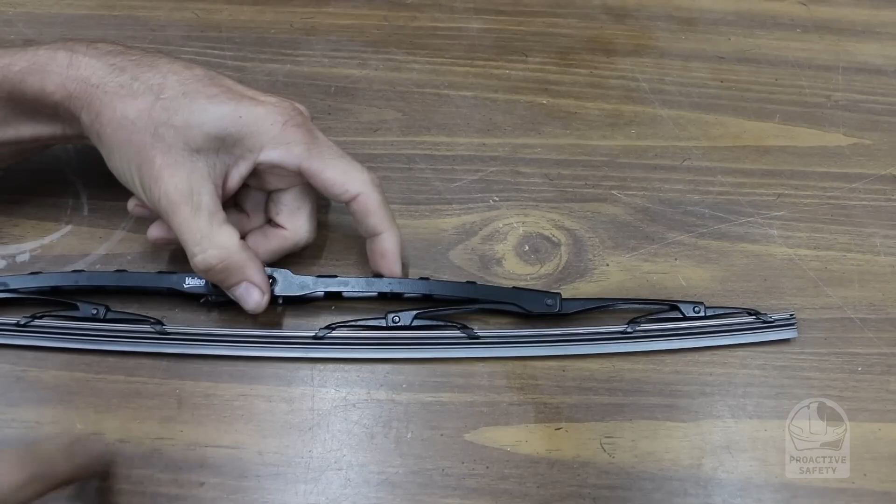Wiper washer. Test the windshield wipers to make sure they work properly. Replace them as necessary, especially when constantly working in adverse weather conditions. Even a slight delay caused by glare, excess dust, or dirt on your windshield could mean the difference between life and death.